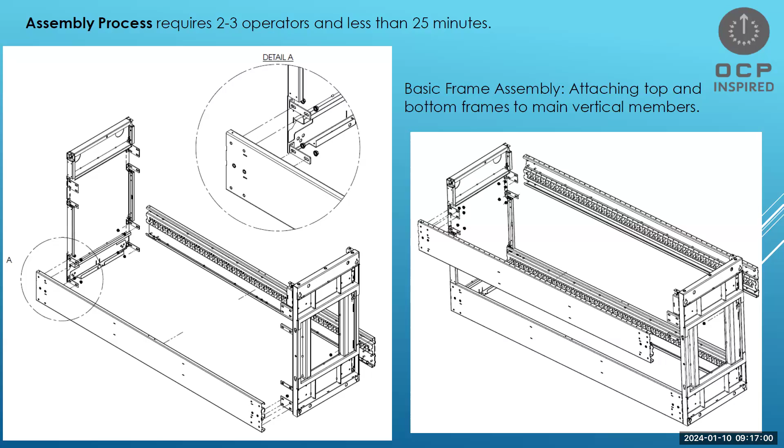So it starts out, you have the top and the bottom, and then you begin by attaching 4 of the vertical members on it to get the basic structure. After that, you add on the additional vertical support members here. Then you add on the casters and the leveling feet, and then you add in the left and the right cable channels, because as we know, they're now separate components from the main frame.

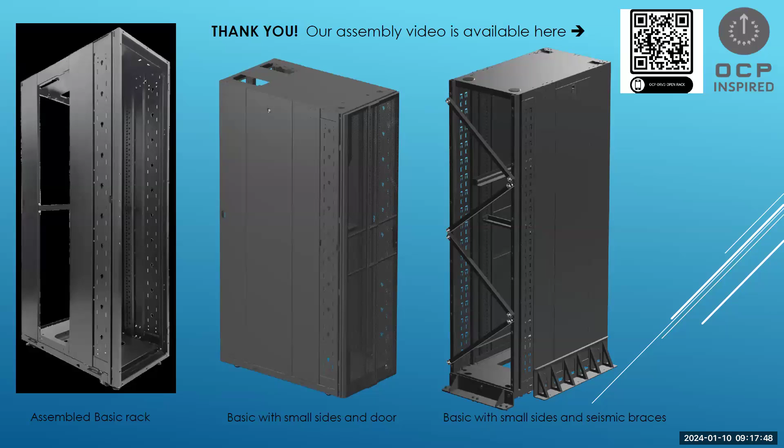And then after that, and I guess you could probably even avoid these components if you wanted to, they're for additional strength, the horizontal braces, and then we even include the bus bar in here as well, to put the whole thing together. And this is a simulation of when it's fully assembled on the left-hand side. And then we have just a couple other images to show the same rack with the small side panels, and another one showing some of the seismic braces.

So I've added a QR link that'll take you to the video where you can actually watch our people assembling it. As I said, there were 3 people doing it. It clocked less than 25 minutes. And as I said, this is a conservative time frame. It certainly would take less than that if you were to set up an assembly line, a pretty basic system. You don't need a whole lot.

We do not require special jigs to do the assembly process. It's kind of self-aligning. You don't need any really special tools. The hardware is mostly standard Torx bolts. You don't need anything special there. And then at the end of the process, to verify the alignment, we have a simple go/no-go type jig. So that's what we developed.

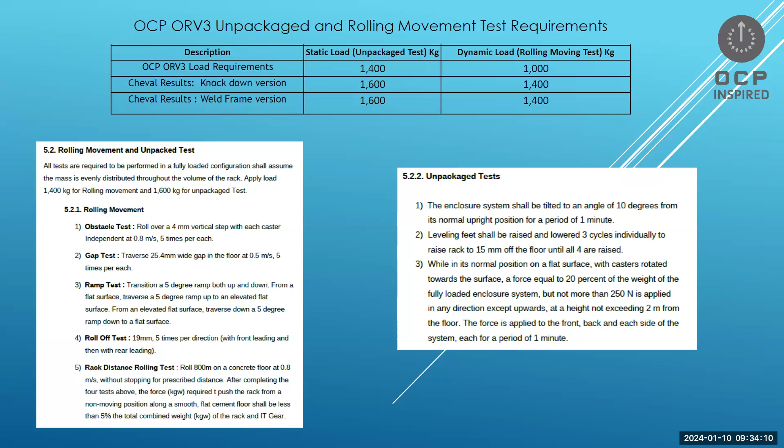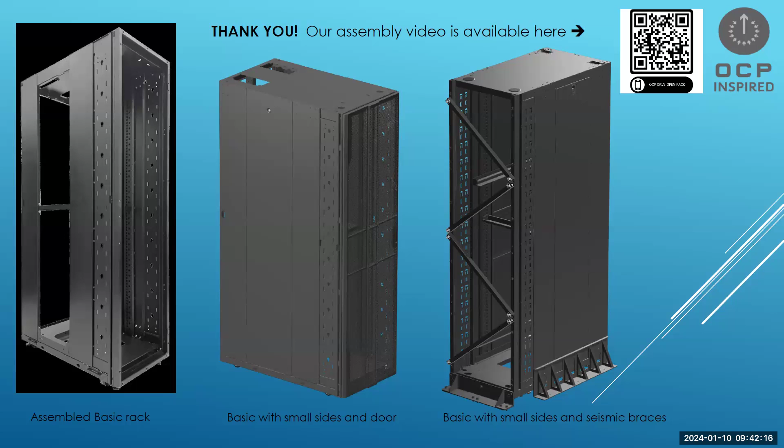The power zones, I think, is referring to a vertical partitioning of the bus bar. No, that would, okay, yeah, sorry. That might be right around this area here, I think. Yeah, I've seen that separated in the front, also with split doors and things as well. But I don't know how that connects to the bus bar. I'm just not familiar with that. I'm sorry. Right, okay.

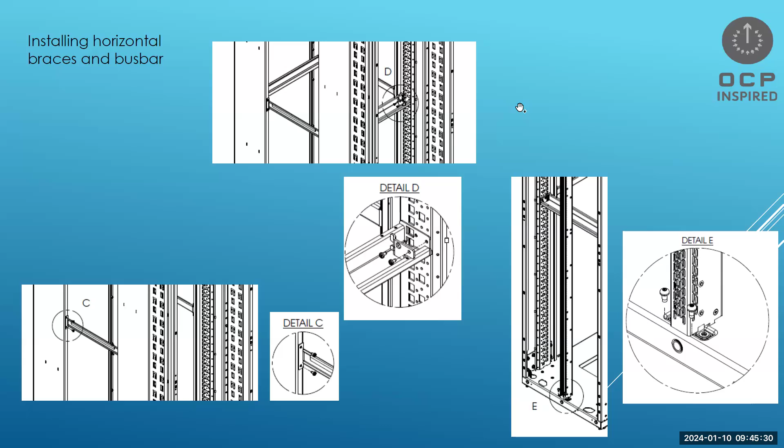So I have one quick question, if I may. What's the build tolerance or the accuracy tolerance once the manually constructed version is put together compared to the manufactured welded version? Is there a significant difference in the tolerances for fit and accuracy of placement of things? No, it's going to be pretty much the same. Otherwise, the equipment won't fit in there. So we have to maintain the same tolerances, whether it's the welded version or this knockdown version here.

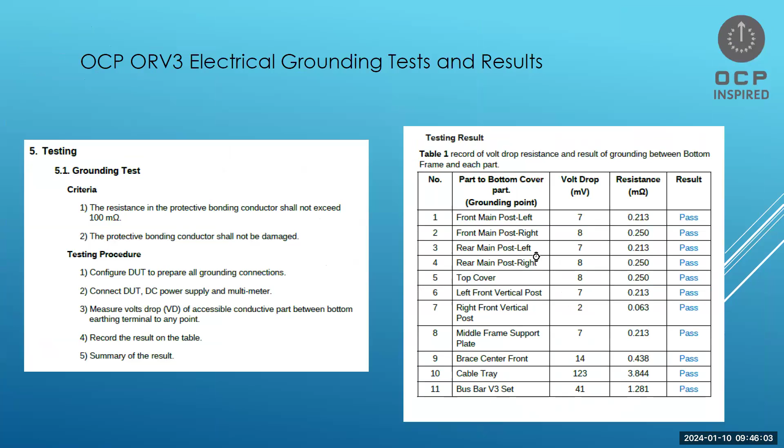I did not show it, but when we do the testing, what we've got here are just the top level results. But what they do is they'll take multiple measurements from the front and the rear on the side, before and after the test. That data is not here, but we check all that. And between the welded frame and the knockdown frame, there's no real difference.

I can refer to the EIA racks as well, because there you have quite tight tolerance between the rails, and those have to be very precise. So this one is a little bit bigger than that, and you're not using the 19-inch rails quite as severely. So it's a little bit looser. But between the two, it's the same.

In fact, the welded frame is probably a bit more difficult because you've got one large piece to control during the process, and you have many factors that can affect the dimensions during manufacturing. So in some ways, the knockdown version is easier, but it's a question of how you develop your manufacturing process.

I think my concern would be the stack up of tolerances as you build. If your multiple components all have some tolerance, and you get them all on the wrong side of the tolerance band, you end up with something which may be out of tolerance.

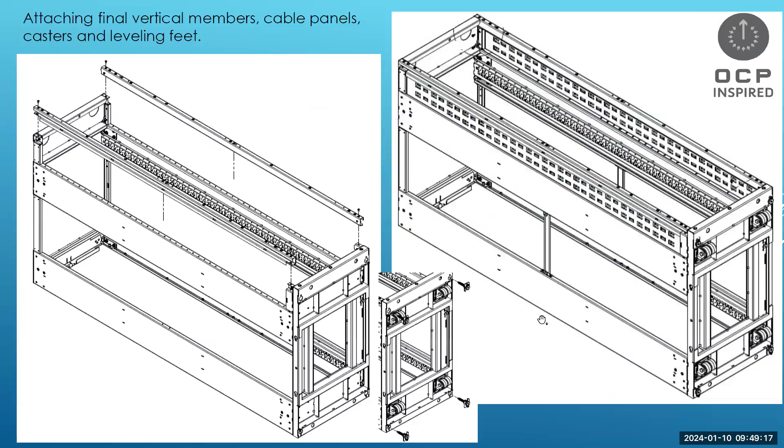No, there's no braces on it. It's done just as you see in this image here. The braces you're referring to, these braces here, no, we're not using them. This is for the seismic bracing, and we did not test that one yet. I was thinking not so much of the seismic braces, but the horizontal. If you go back to the breakdown diagram, there's some mid height. Yeah, this right here. Those ones.

I believe they're... I can't tell from this picture. I would think that they're in there. Now, of course, you've got these shelves in here. These are obviously very strong shelves to support the weight. You have to have them, otherwise you can't do the test. But there's nothing else in here other than what's specified in the bill of material. There's no other braces, no other structural support to the rack. It's just as it is.

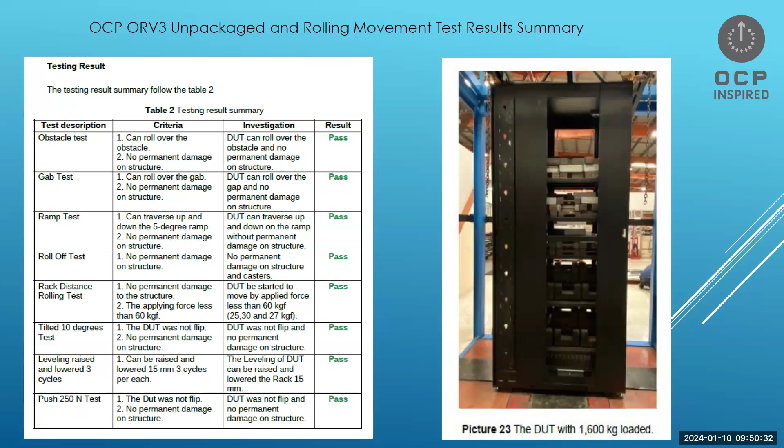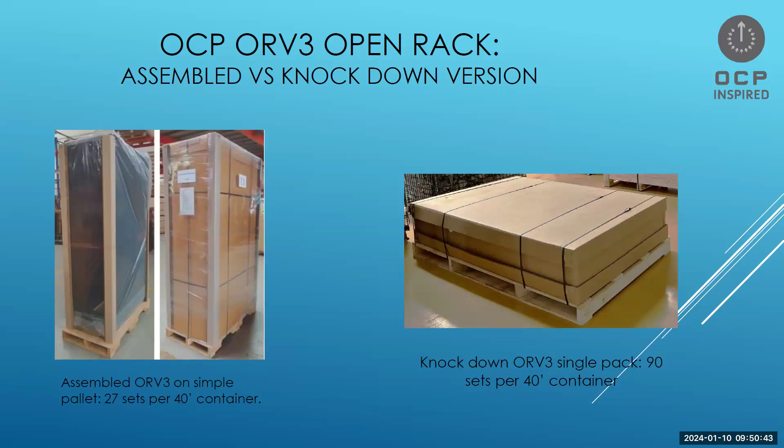In the broken down packaging, I think you mentioned that they were stackable, and you gave a number how many could be stacked. Yeah. So from this dimension here, you could actually stack up to 7 in a 40-foot container, but we only stack 5. So we've got 18 stacks of 5 for about 90 racks.

You could put more, but we don't want to really push it, so that's where we stop. And so that's what you would stack in your warehouse too? So we would advise not going over 5 on one. If you have racks in your warehouse, yes, and you can do multiple stacks of 5. But this is a very heavy duty carton material, and also the wooden pallet as well.